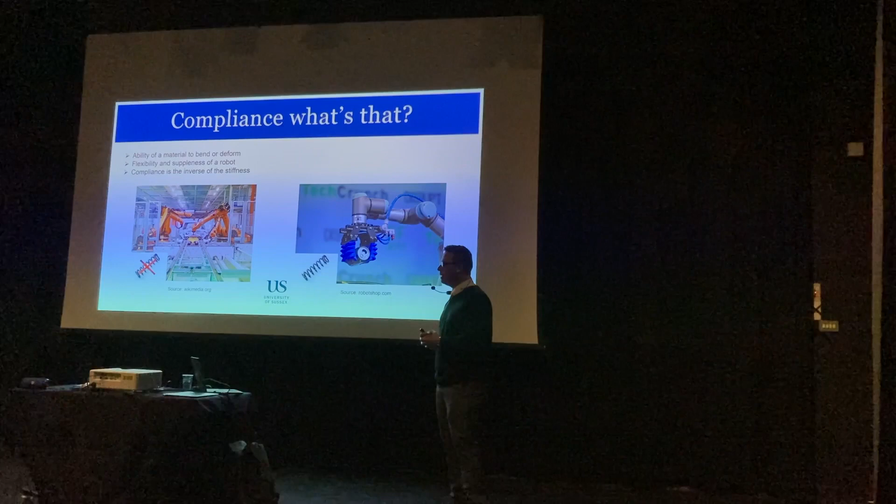So I will start with a quick definition of what is compliance. Compliance is the ability of an object to bend or deform. I often take as an analogy the simple spring - it's a mechanical element which, if I apply a force, will deform and displace. The compliance is actually the opposite of the stiffness, so it's the ratio between the displacement over the force. It's used to describe the flexibility or the suppleness of a robot.

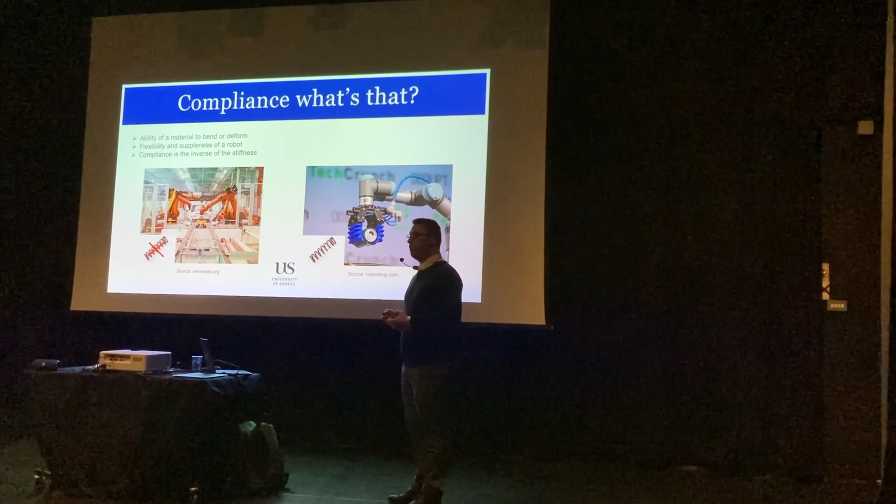I take as an example those type of robots which I consider as stiff, so not compliant robots, which are classic industrial robots. You can see here probably in a production line for cars. Those robots need to be protected with those fences where no human is allowed to cross, except in a specific condition when the robots are stopped - because since those robots are very stiff, they may be dangerous and could harm anyone entering their workspace while they are moving.

So I oppose those type of robots to this type of robot. Here we have a UR5, which is a universal robot, called also a cobot for collaborative robot. In its controller and design, it's meant to be collaborative with humans. For this type of robot we find some control strategies that will allow users to apply a force while it's moving, and the robot will interact safely with the user.

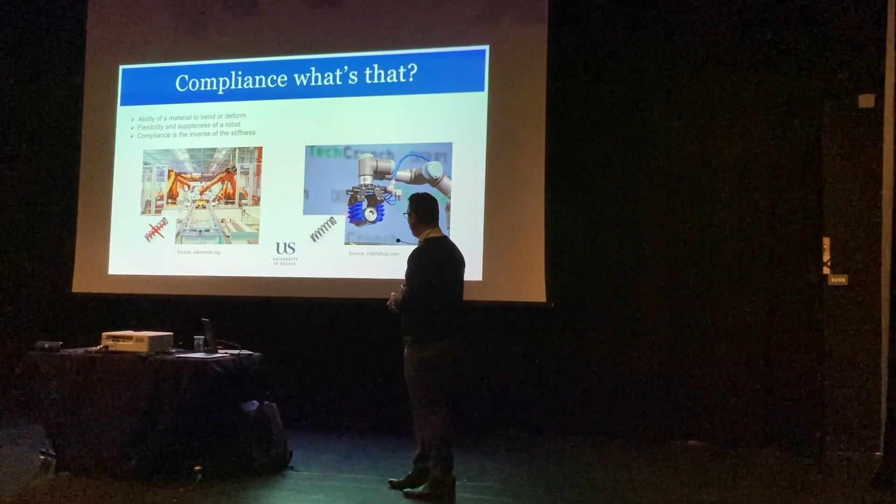Additionally, we can see that here in the gripper we have what we call a soft gripper. This gripper is made with elastic material, which will also bring some compliance to the robot, so you can see here it can grab an empty can without crushing it. So basically, I'm working on compliant robotics, so I'm more on that side of the robotics.

Now, to explain a bit how we can make a robot compliant, there are, I would say, two main approaches. The first one is basically using a mechanical approach. So in the design of the robot, we will either use some soft materials - soft robots, soft materials are robots that are made from elastic materials, elastomers, rubber silicone, those type of elements. This will bring an elastic body to the robot.

We have another approach using passive elements. So I gave the analogy to a spring earlier - we can introduce some passive element. Here you can see some springs; the name of that device is called the remote center of compliance. By putting those springs in parallel, if we try to guide the robot to assemble two parts, and those parts are not perfectly aligned, this compliance will take over and allow the alignment of the parts.

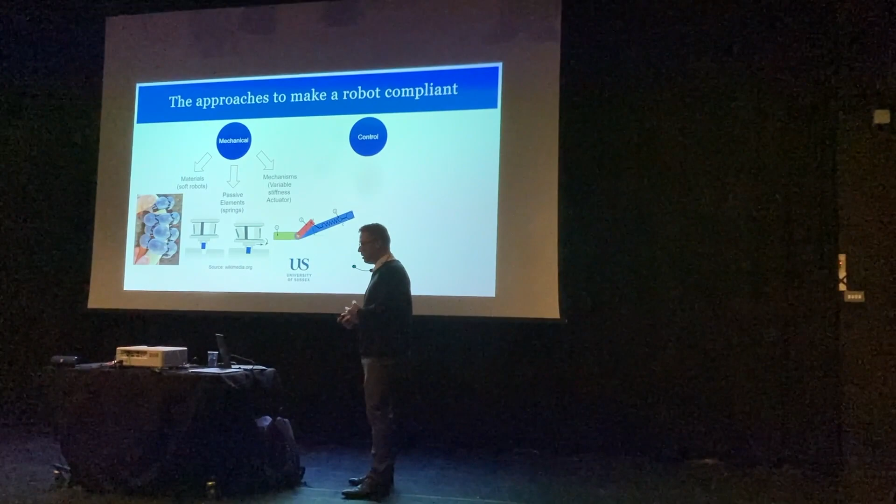Then another mechanical approach is designing what I call compliant mechanisms. Those mechanisms are generally composed of different elements. Here we have an example called the MACEPA, which stands for Mechanically Adjustable Compliance and Controllable Equilibrium Position Actuator - it's really long, so MACEPA is fine.

So we have three parts basically: the green one, which is attached to the base of the robot, and then here we have the robotic joint itself, and we will have two motors - one that will basically position the red link here to a direction, and the second one that will basically tension a spring.

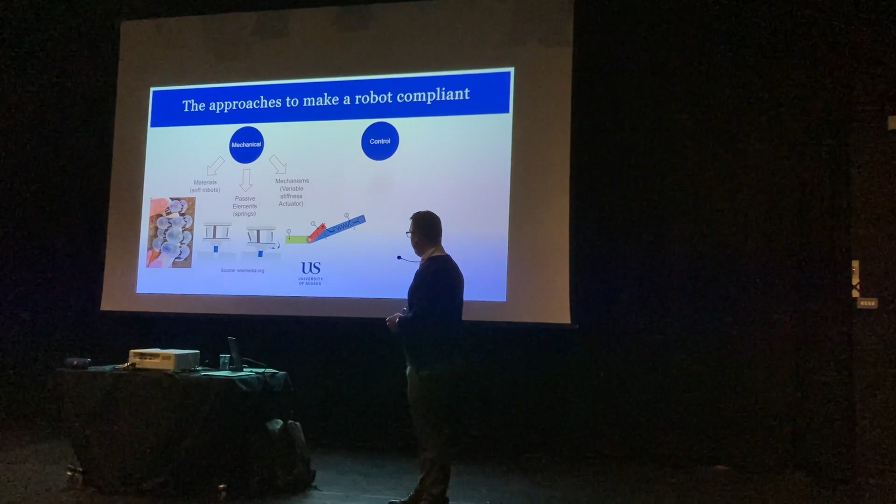The first one can give a general direction, where the second one, attached by the spring element, if I apply an external disturbance to the robot, will basically comply around the expected position given by the red part. So with the second motor, I can adapt the stiffness and compliance in real time according to the condition—do I want a very stiff joint or a compliant joint according to the scenario? We can tune that with that second motor.

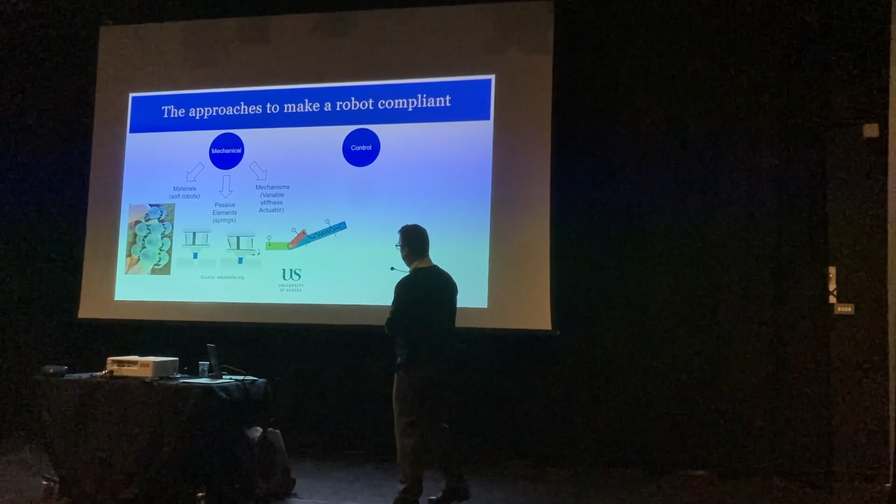So that's the mechanical approach. Of course, there are also possibilities to work on the control strategy—how do I control my robot to make it compliant? Here are some examples of control strategies for robots that bring compliant behavior to the robot.

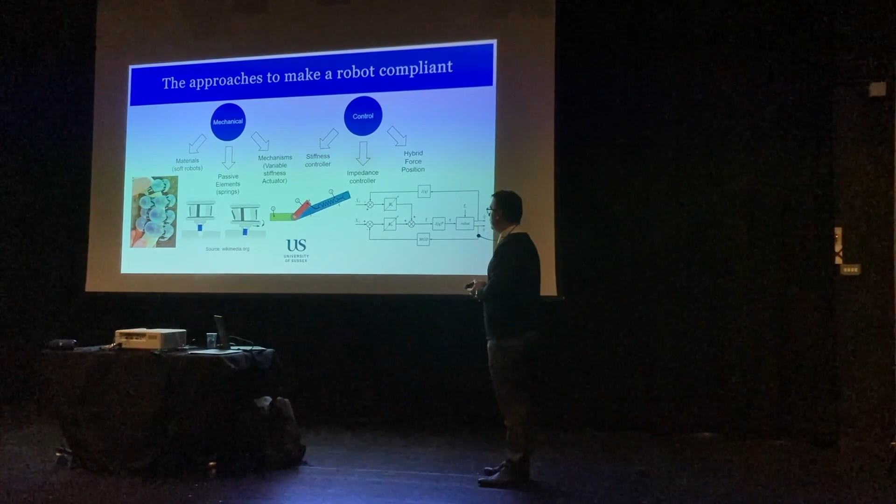The main ones are stiffness controller, impedance controller, or hybrid force position. These generally rely on measurement of the disturbance, the external force applied by the environment or the user, which is then implemented in a control strategy. Instead of being very accurate on the reference position we aim to have, we take into account that interaction to move the robot and comply.

So if I have to compare all these methods quickly—of course it's a bit more complicated than that, but I'll try to simplify the context—the control strategy approach needs minimal hardware modification, meaning that except for possibly adding a few sensors, we don't necessarily need to redesign the whole robot. So it's quite interesting in that sense.

One of the limits is the bandwidth, since most of those strategies rely on the fact that we need to sense the disturbance and let the controller react. They don't necessarily behave super well when the interaction is at a really high frequency, or with any shock, for example. Sometimes the impact with the robot is already done, and then the controller starts trying to add the compliance, but it's not necessarily instant.

The other approach, based on mechanisms or variable stiffness actuators, is generally quite simple to control because they're built so that one element deals with the position we try to reach, and another element controls directly the stiffness. So it's quite simple to implement. However, they generally get a very limited range of stiffness variation—the compliance we can reach is generally always in the same range, due to the fact that they rely on passive elements.

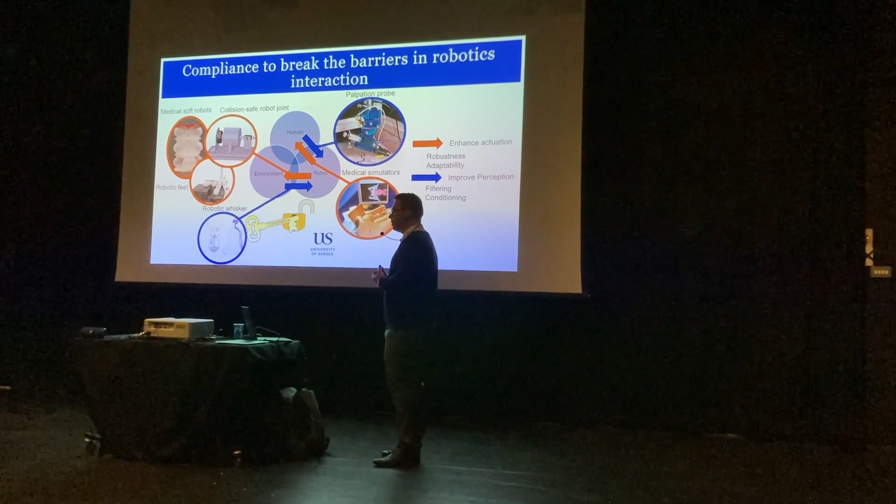So I believe that compliance is really the key to breaking the barriers between the robot and the humans, or the robot and the environment. I will try to illustrate that through different examples taken from my research. In particular, I would like you to appreciate how compliance can enhance actuation, making things more robust—robust to disturbance, to unpredicted conditions—or adaptable, meaning it helps robots adapt to uncertain environments.

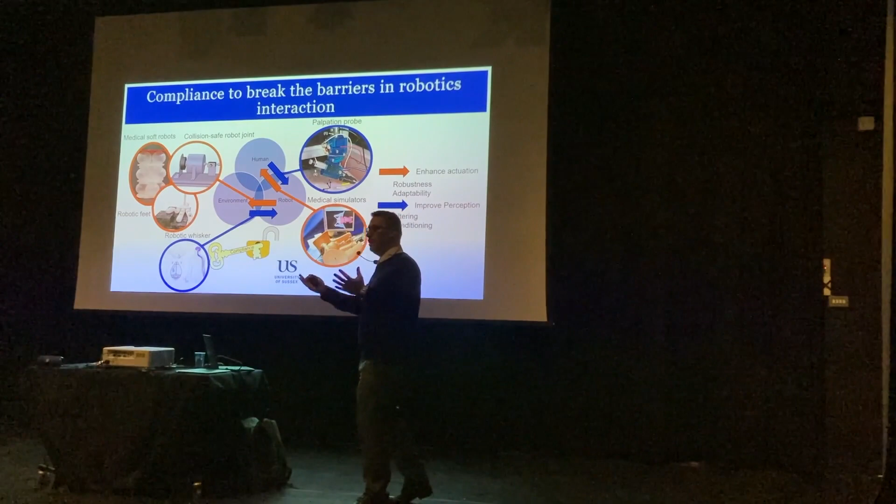The second thing is that it can also improve the perception—by perception I mean the sensing of the robot. Since compliance is actually a kind of element that can filter the mechanical signal, it can play a role where, using compliance, we can basically filter out the unnecessary mechanical signal that we don't need, and condition the perception of the robot to extract really the information that matters. Unfortunately I won't have time to cover all these examples, so today I'll focus on the perception with the palpation probe, and for the actuation part I'll talk about three examples in more detail.

So I propose to first start with the palpation probe, and to give a bit of context about this probe.

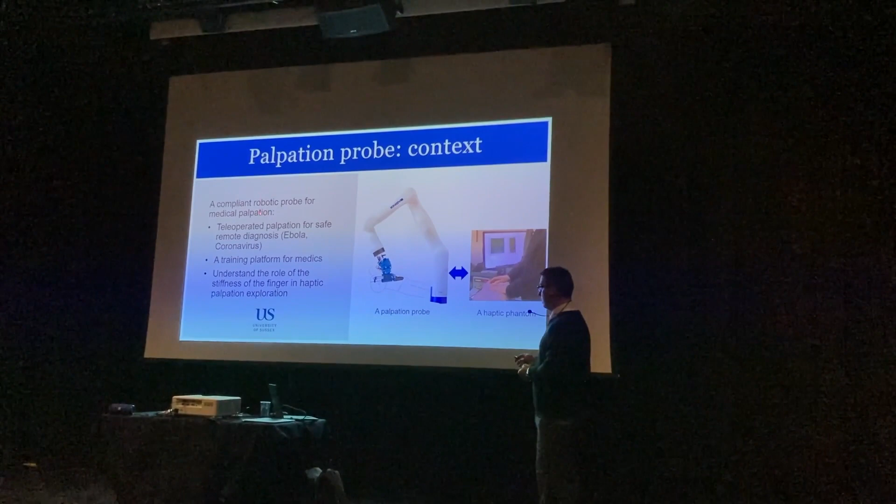It's basically work that I've been doing while I was at Imperial College, before the big coronavirus pandemic. At that time we had Ebola in mind, which is a really contagious disease, and we were thinking that maybe having a robot that could perform palpation on the patient would be interesting, because a GP practitioner could be in a safe place sending a robot to perform the palpation. The robot would send back the data to the GP, who could evaluate the state of the patient remotely.

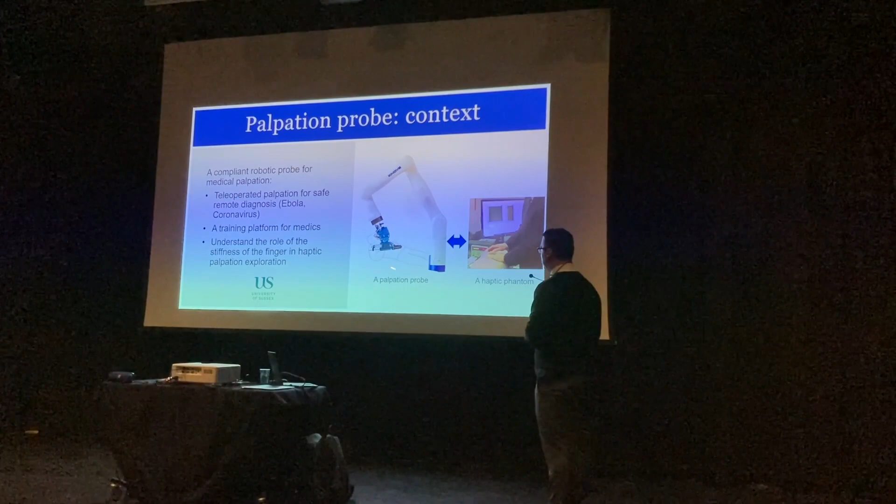So to do this, we worked on the palpation probe to analyze the condition of the patient, and a haptic phantom. A phantom refers to an advanced mannequin that reproduces a patient's condition. The idea was to develop those two things so we can perform remote palpation. I personally mainly focus on that part, but I will talk a little bit about both.

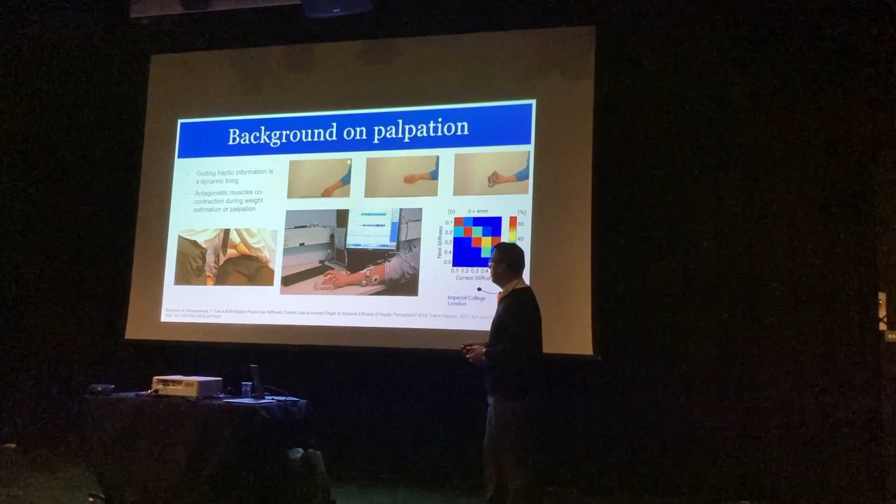There was some context already when I started working on this project, from work done by a student at King's College. What he studied is that when we try to assess a property, such as evaluating the weight of an object, or when a practitioner is performing abdominal palpation, we rarely do those types of tasks statically. If you ask someone to evaluate the weight of an object, they won't just grab it and say 'I think it's 20-30 grams.' Generally, people shake the object, and we were trying to figure out why we need that motion.

One hypothesis we developed is by measuring the muscle activity of antagonistic muscles in the arm. We noticed that at some point during those motions, we contract both muscles. Those forearm muscles control the motion of the fingers and wrist, but also their compliance. So if I contract both antagonistic muscles at the same time, my fingers become very stiff, but if I relax, they are compliant.

So we looked at how that compliance evolves during a task of palpation or evaluating the weight of an object, and we noticed that compliance is changing with time. The hypothesis we formulated is that compliance probably helps in getting more information during those operations.

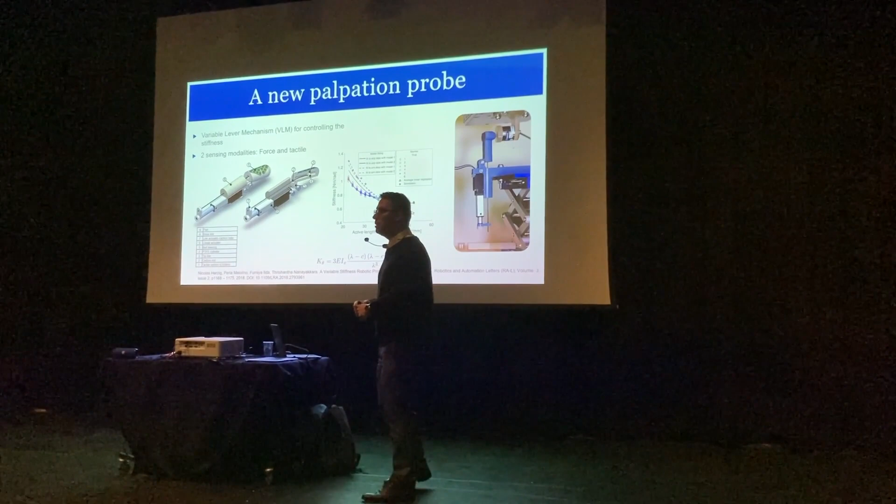To test that further, I decided to design a new palpation probe that could change stiffness in real time to perform palpation. Here is the model of the probe. You can see there are some rigid, 3D printed parts, and in the middle a carbon fiber rod that can bend — the same kind used in tents and similar products.

The way it works is simply the principle of a cantilever. If the cantilever is very long, it's easy to bend at the end; if I shorten the length of the beam, it becomes very stiff. So by changing what I call the active length of the cantilever beam, we can change the stiffness at the joint level of the finger.

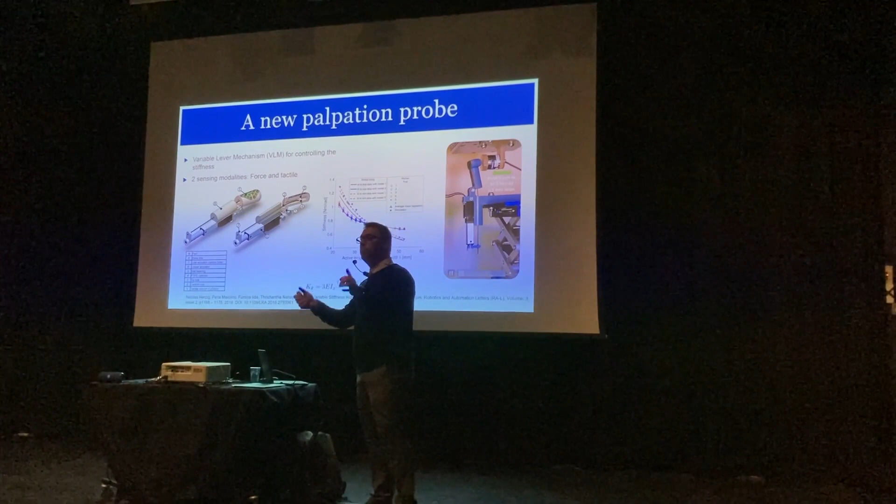So we studied how that stiffness and compliance change according to the length, and then I started to investigate the palpation aspect.

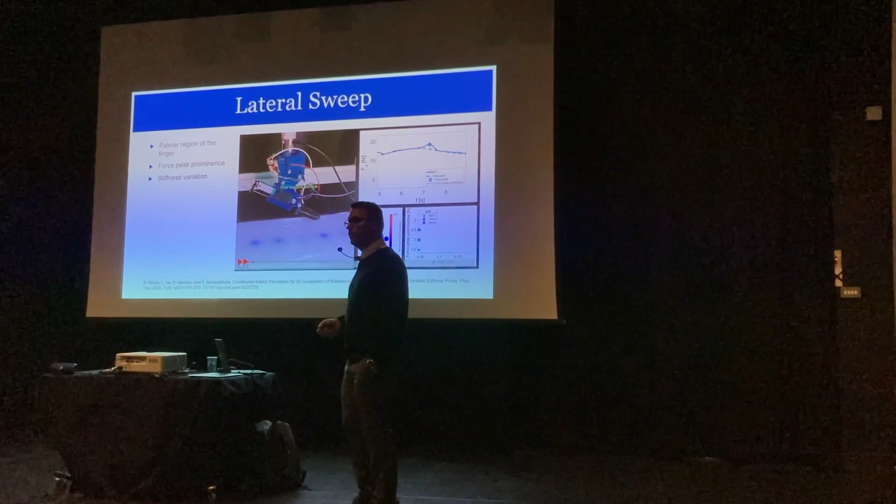Here we have a rubber silicone material, which is quite soft — we tried to match the stiffness of soft tissues during palpation. Inside that silicone I placed some plastic beads which represent cancer tissues that would be stiffer than the rest. The idea is, can we first detect this type of stiff inclusion, and can we even predict the depth — how deep are those nodules.

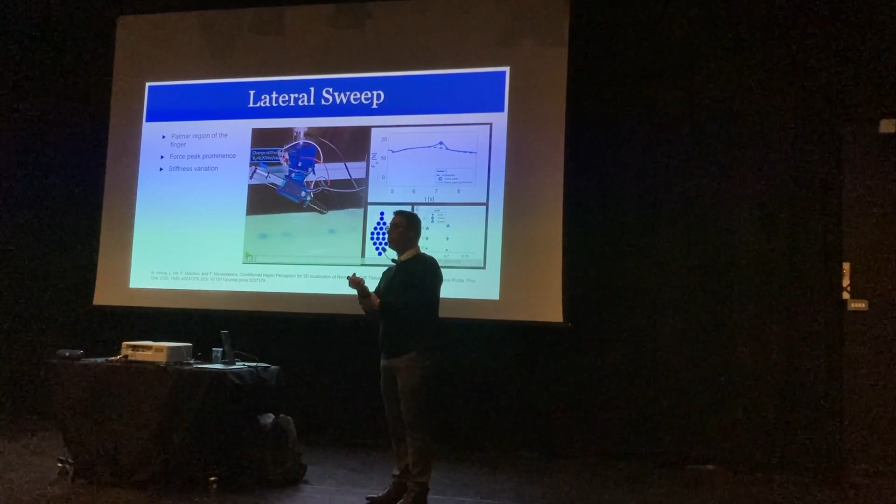I studied two types of sweep for the finger. The probe is equipped with two sensors: one is a tactile sensor, which measures what happens at the skin level when we palpate, using capacitive sensors to measure the pressure contact at the skin level. The other is a force sensor, a load cell, that measures the normal force, representing the information we get from our tendons when we palpate — what we call the kinesthetic sensing of the body.

Using those two sensors, I studied what we could get from this sensing for different stiffness levels. We swept laterally with the finger fully in contact with the tissue, sliding across it, and we noticed a peak of force when the probe reached over the nodule. Using that peak information, I can estimate when during the sweep the nodule was detected.

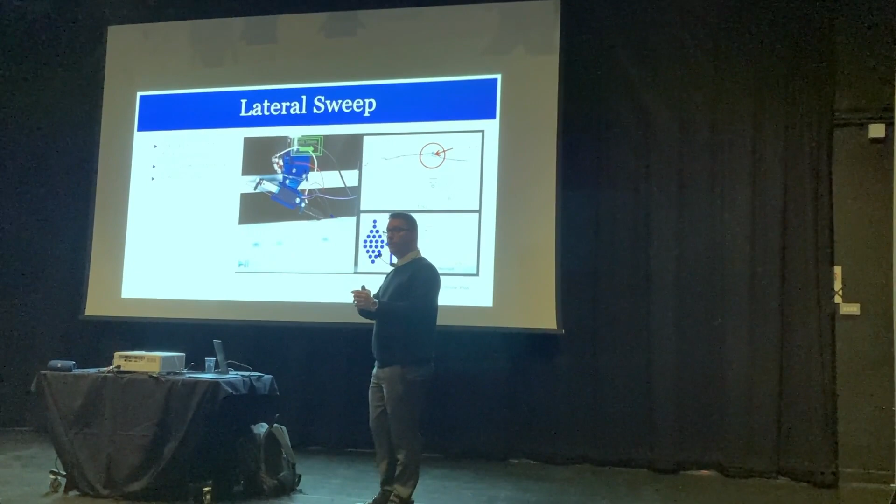And with the tactile information, maybe I can locate where in the finger was that nodule. By correlating the two pieces of information, I can localize where the nodule was.

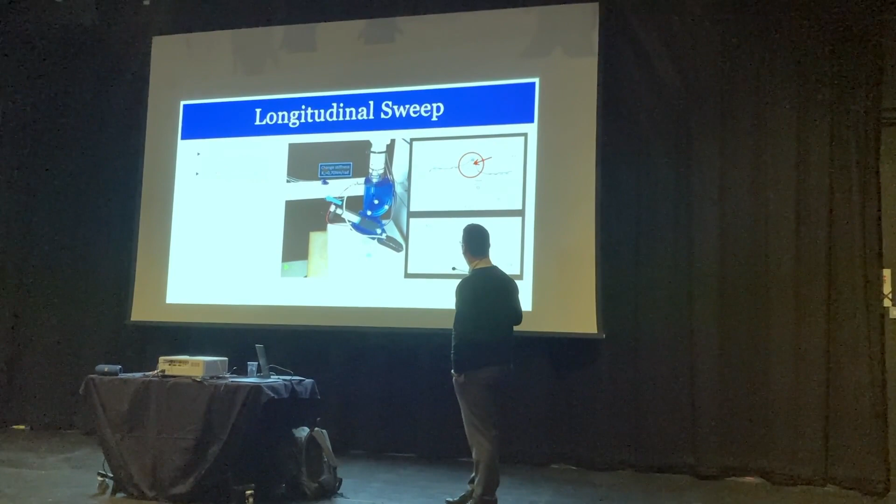The second type of sweep I've been investigating is what I call the longitudinal sweep. This time we sweep the finger in this direction. Similarly, I tested with different depths of nodule, and different stiffness every time. We can see here that the range of values is the same, but the peak is slightly easier to detect.

After combining all the results, this is what we obtained. I know those figures might be a bit scary at first, but basically what it shows in summary is that for the lateral sweep, we have a gap. Those are probability distributions, and we can see that they are separated.

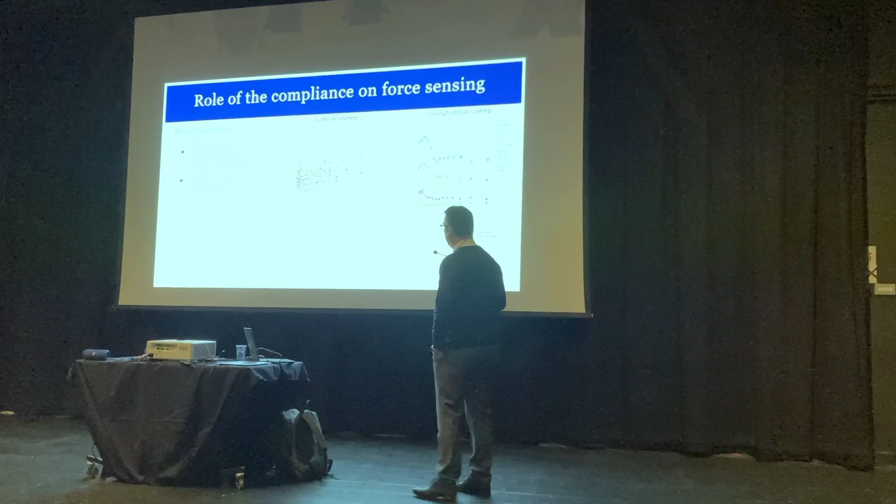So for the force peak, when there is no nodule and when there are nodules, what it means is that for the lateral sweep, we can detect when there is a nodule versus no nodule, but it's extremely difficult to estimate the depth. You can see that for different depths, the distributions all kind of merge, and it's not really possible to detect the depth of the nodule.

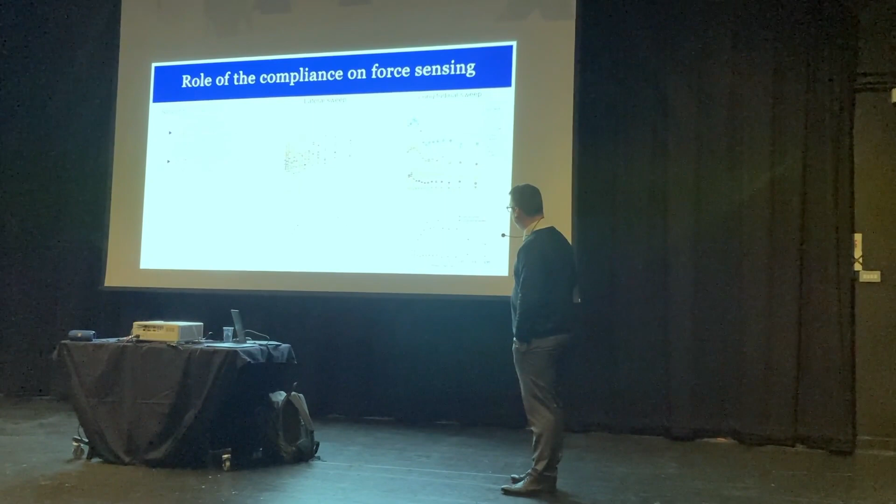However, if I look at the longitudinal sweep, we can see that this time the case where there is no nodule is quite close to the case where the nodule depth is around 8 millimeters, but we can distinguish each depth independently. Moreover, the role of the stiffness, the compliance of the finger, plays a role. You can see that the distance between two distributions for some depths changes with the stiffness.

It means that if I look, for example, at this stiffness, the force peak measured when the nodule is at 8 or at 6 millimeters are kind of overlapping. So that's probably not the best stiffness to distinguish between those two depths. But on the contrary, the distance between 4 millimeters and 2 millimeters is quite large, so depending on the force I measure, I'm more likely to decide if it is 2 millimeters or 4 millimeters.

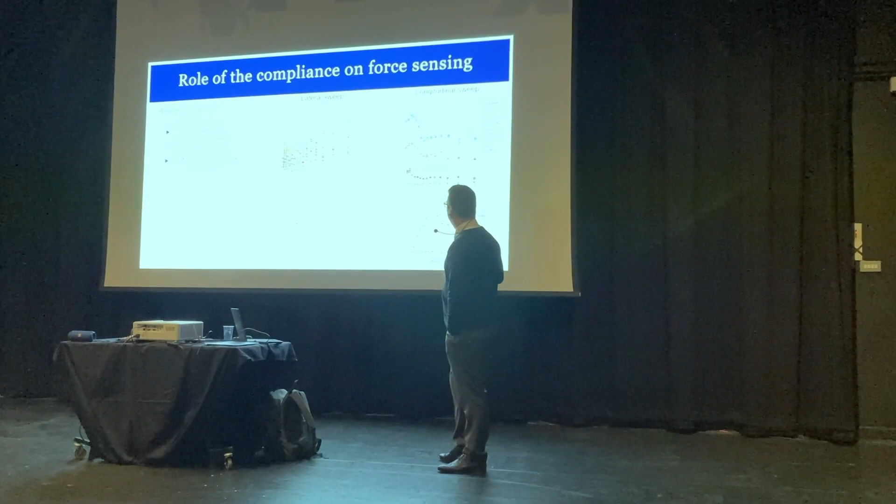So we built a tool called the information gain, which measures for each stiffness what is the amount of information I will gain if I need to detect this specific depth of a nodule.

And I basically implemented that in a control strategy. The way it works is the control strategy will start with a lateral sweep. I position the probe randomly over a region I want to examine, and the robot will first detect where the tissue is, then proceed with a first lateral sweep.

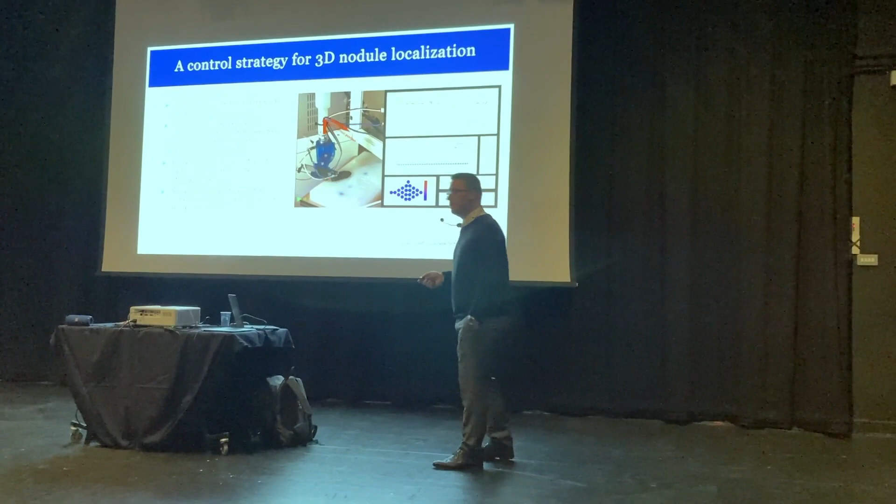That allows me to localize, in two directions X and Y, the position of the nodule based on the peak force measurement and the tactile sensing. Then, in the second step, we try to estimate how deep that nodule is.

To do so, we use what we call a Bayesian inference. We repeat tests with different stiffness until we confidently estimate the depth.

So we have the first sweep with one stiffness. You can see that at the beginning, the probability of being a certain depth is constant, and after that first longitudinal sweep, the algorithm starts to determine that it's more likely to be around 4 millimeters.

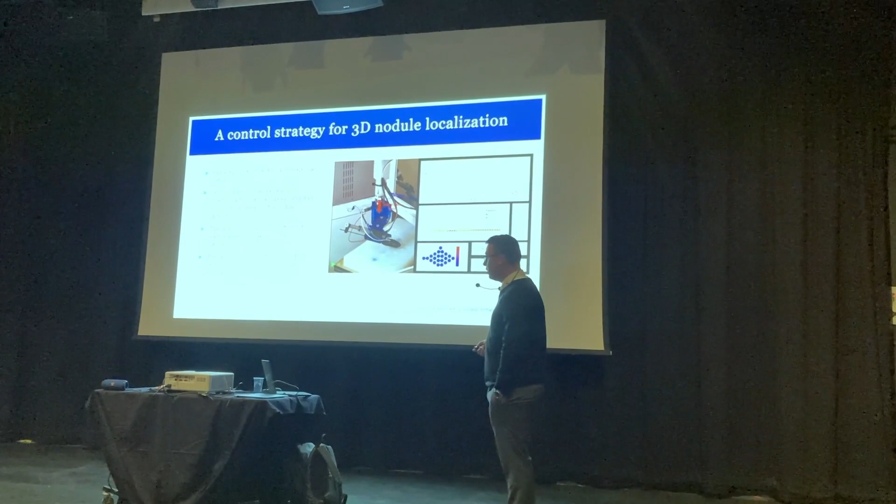Then we adjust the stiffness to try to maximize the information we will gain from the next sweep. After the second longitudinal sweep, we estimate with a bit more confidence that the nodule is at 4.5 millimeters. The actual value was 4 millimeters, so we are under 1 millimeter accuracy.

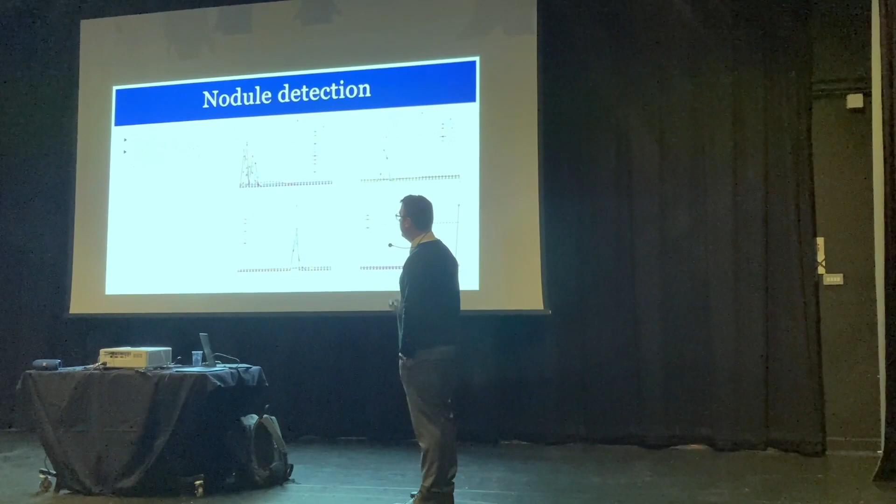So here are the results. We tested different depths to evaluate, and basically the algorithm was quite confident with 100% detection, meaning every time there was a nodule, we could say there was at least a nodule. The accuracy in depth estimation was under 1 millimeter, with 3 to 10 Bayesian iterations, meaning we had to repeat the sweep up to 10 times.

If we look at how the algorithm changed the stiffness, sometimes it ran 2 or 3 times in a row with the same stiffness, because the algorithm considered it was still gaining information by repeating with the same stiffness. But it was also adapting the stiffness from time to time to gain more information when another stiffness was more interesting to estimate.

So that's one of the limitations of that algorithm: it requires knowing in advance the value of the peak force. That means we probably already performed some palpation on this tissue, and that's a big limitation in the context of medical application, because we might not have access to a big database of patient palpation.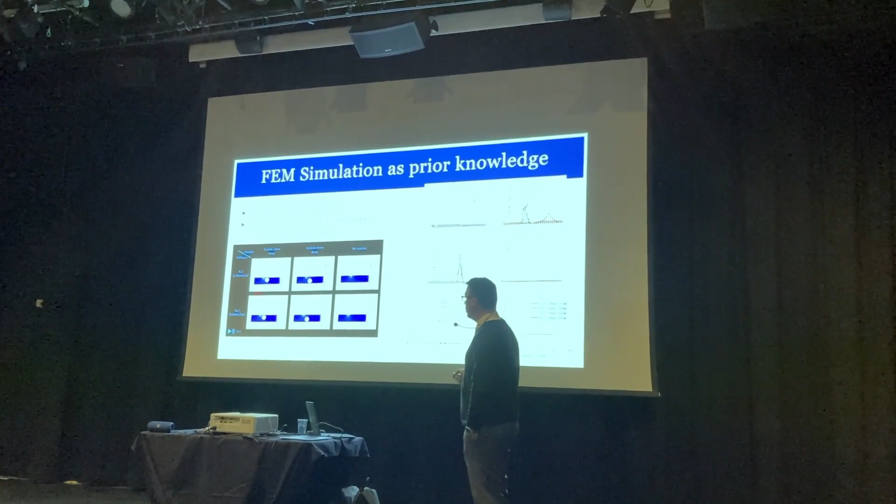So I also tested based on simulation. I ran some finite element simulations to simulate what's happening during the sweep, and based on the force peak estimation obtained with that data, I reran the test, not knowing the tissue I was palpating. The result was that it was as accurate but less confident, meaning the algorithm struggled more to converge to a confident value, and the probability distribution was slightly wider, so less confident on the estimation value, but it still worked.

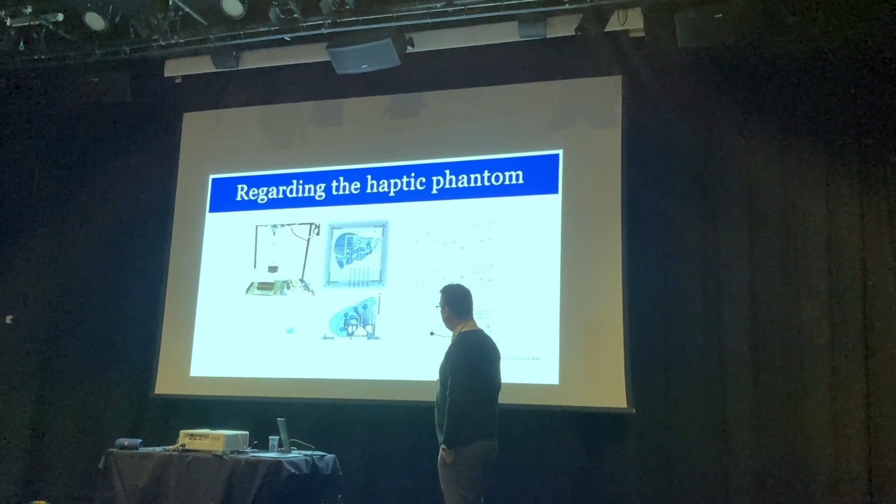I will just talk quickly about the haptic phantom part, the other part for the GP to run the palpation. Similarly, we use compliance there in the phantom. So we have basically some silicone rubber that mimics the stiffness of the liver, and we had also some silicone to mimic the amount of skin and fat on top.

And inside, we put some rubber balloons, basically, that we can inflate with different dimensions and different pressure. So we can mimic different patient conditions, some with, let's say, cancer tissues, or different liver conditions. And the interesting part is that when we want to describe another patient condition, we just change the pressure inside those nodules, and then we keep them constant so the GP can test.

So we can use that either to practice palpation or in teleoperation. And the interesting thing is that once the patient condition is set, generally we close the valves reaching those nodules, and we can use the pressure sensors to detect and estimate where the GP has palpated. That's quite interesting, because we use the same thing to mimic a condition and to measure at the same time, which avoids, for instance, adding sensors on the gloves, or other sensors that may affect the palpation of the GP.

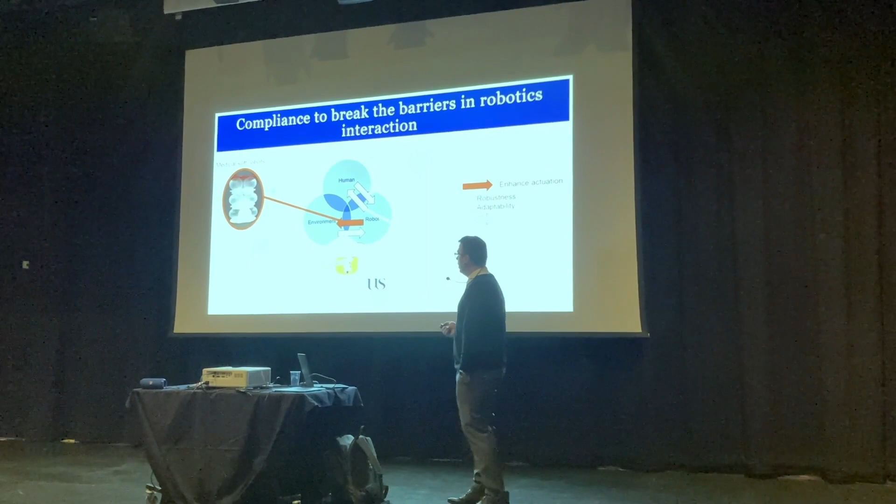So that's it for the part on the palpation probe. Now I will be switching to the part on the actuation, and I will present different examples where I think compliance is enhancing the actuation. I will start with this project, the medical soft robots.

So why do we need soft robots? It's because in the clinical context, the robots used for surgical environments are still rigid. Here we have an example of the Da Vinci robot, which is a really well-known robot for minimally invasive surgery.

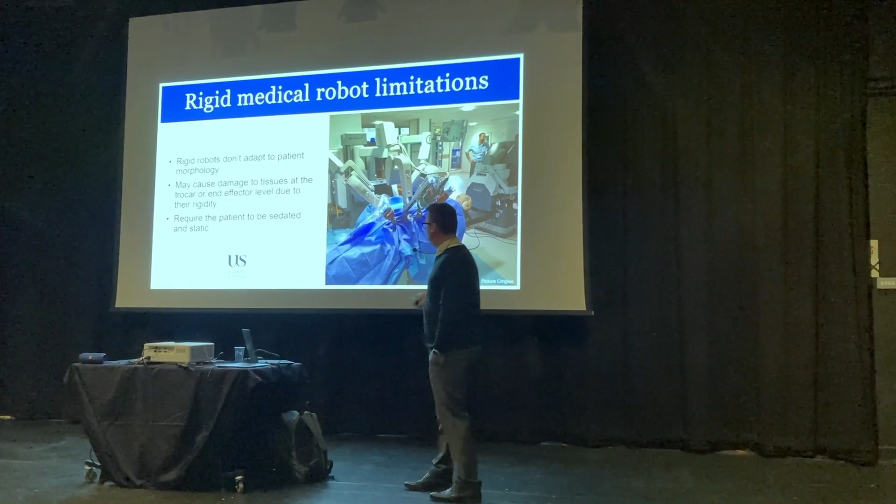So basically, here is a fake patient, a mannequin, but we have the 3 robotic arms. We have some trocars on the patient, small incisions. They inflate the tummy with some carbon dioxide, and they can perform minimally invasive surgery with the robot. So here we have the robot, and here we have the interface where the surgeon sits and sees, with an embedded camera, what's happening, and two joysticks to control the robotic arms.

So the problem with those types of robots, in my point of view, is they are great, they allow amazing things every day, of course, but one of the limitations is that due to their rigidity, they might create injuries at the trocar level or at the end effector where the tool is. So the surgeon needs to be consistently aware of exactly where the tool is, and what is happening at the trocar level, to prevent any injuries.

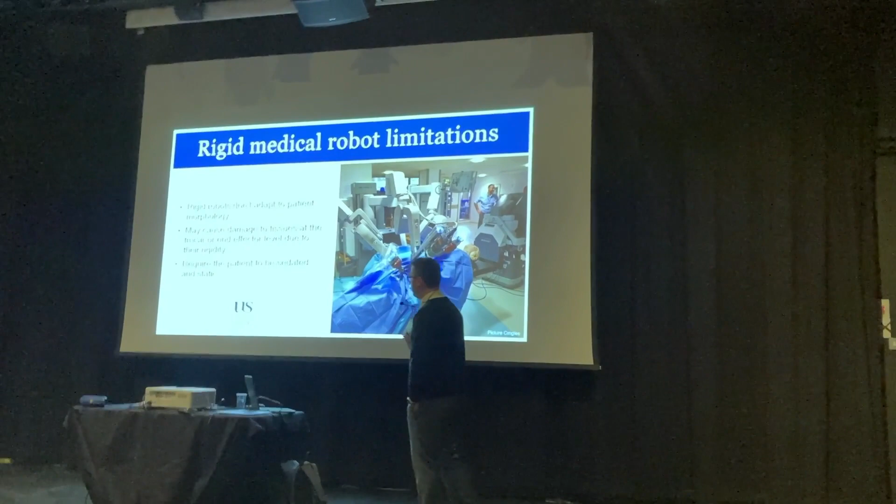So I believe that bringing soft robots into medical applications can be a solution to prevent that. Also, in those contexts, the patient generally needs to be sedated and completely static to prevent injuries, because those robots won't adapt to the patient. So, in this context...

At the University of Sheffield, we used to think that medical soft robots could be used for doing what we call mechanotherapy. So basically the idea would be to use mechanical stimulation to help some tissues regenerate or simply grow. And we have two pathologies in mind that we worked on.

The first one is long-gap esophageal atresia, a pathology where the patients, generally babies because they're born this way, are missing a piece of esophagus. One way to treat that, which is very invasive, is multiplying the surgeries to apply mechanical stimulation to the esophagus and try to actually extend it until the two pieces are long enough to be sutured together.

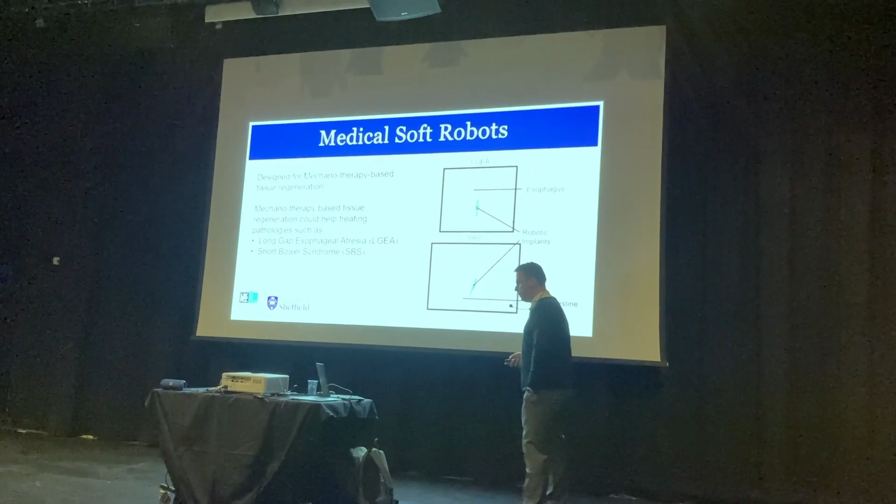Similarly, there are some patients that suffer from short bowel syndrome, meaning they have a smaller intestine than usual. A possible therapy would be to stimulate the intestine so it increases in length. In that context, I designed the following continuum soft robot.

It's composed of different layers that can be inflated, and when fully retracted it looks like that. If I pressurize each balloon, we can inflate the robot and reach up to 180% elongation, which is quite long for a robot.

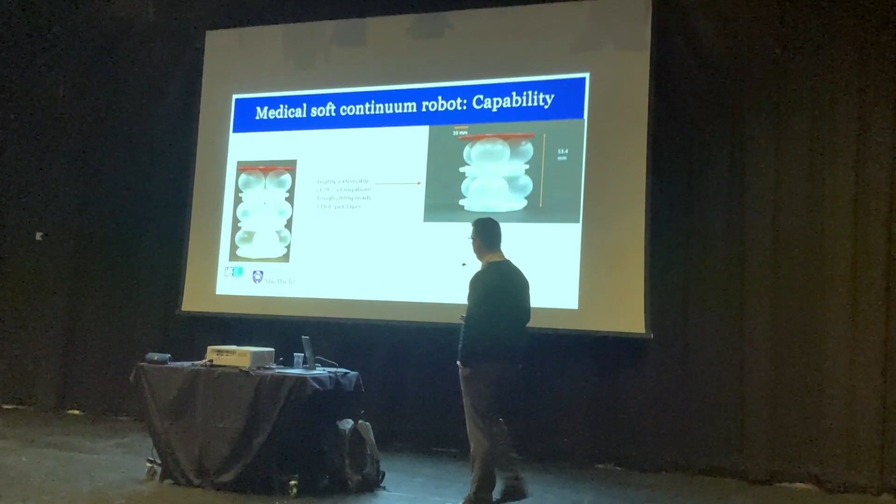It can withstand up to 800 grams, and you can see here, for example, the book that I put on top was not necessarily straight, and the robot will comply—that's one of the interests of this type of robot inside the body.

We could potentially implant that, and the patient will still be able to move, and the robot will comply to the morphology of the patient.

Finally, it's also possible to actuate it in different directions if we wish, by inflating the balloons independently. So how does it work?

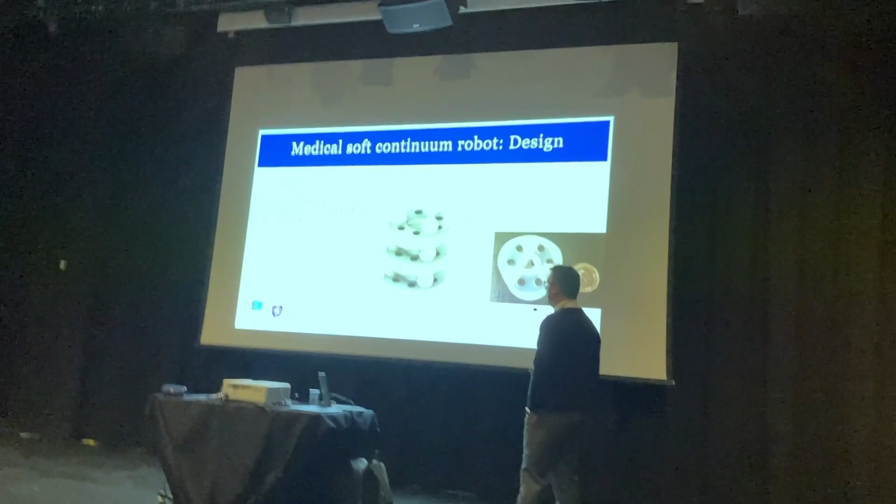How it is made is basically, as I was saying, several layers stacked on top of each other. If we look at one specific layer, we have some 3D printed rigid materials with a hole at the top and another at the bottom, and in the middle a rubber silicone membrane clamped in place, with some chambers.

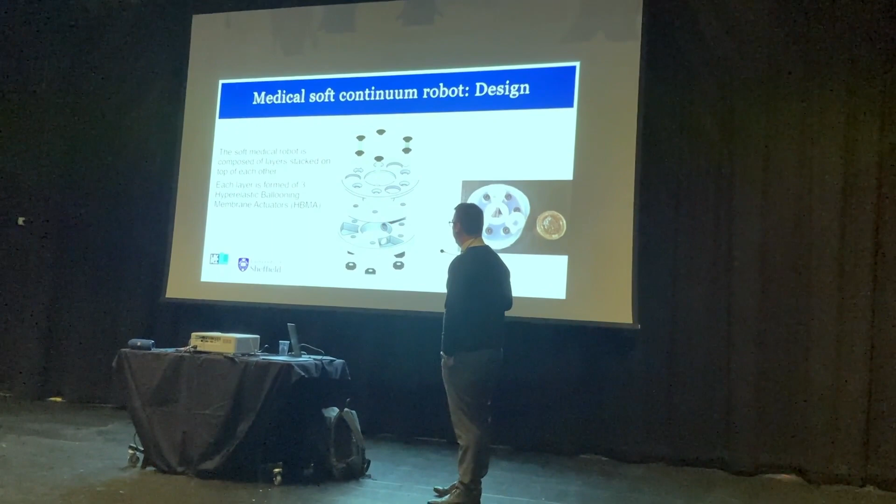So if I inject air into the chamber, it will push the membrane, and the membrane will naturally balloon outside. A single chamber with the hole in the membrane—I call that an HBMA, for hyperelastic ballooning membrane actuator.

Each HBMA can be inflated independently, so we can possibly control the orientation and position of the robot. During my study, I focused on the behavior of a single HBMA to try to understand how it works, proposing some models.

As I was saying, it's just a simple rigid element that clamps a membrane in between, and if I inject air, the balloon will inflate. Part of my research is basically proposing some models.

Of course, mechanical engineers know very well how to model this type of inflated membrane, and that has been done quite a while ago. The only issue is that those models are generally quite complex, and they are difficult to use in real time.

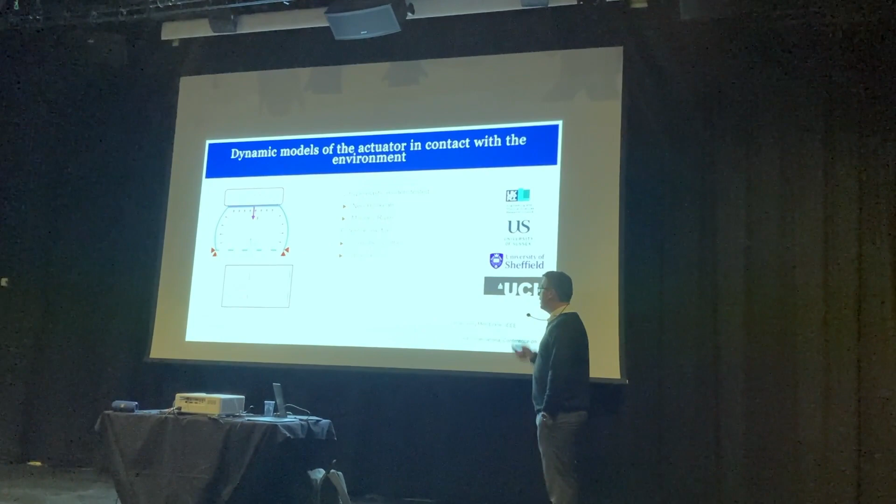So it means that if we want to solve these types of problems for a controller, it remains quite complicated. So my approach was trying to simplify.

What I did is simplify and constrain the geometry, and I proposed a very simple model that could be used for designing control strategy. I still retain some properties, like the hyperelastic property of the membrane here in blue, and the objective is to use that for controller synthesis or observers.

If I look at the result, as I was saying, here I'm simplifying the geometry. We have the experimental test here, and if I reproduce the simulated position, we can basically predict what's happening to that membrane that is compressed.

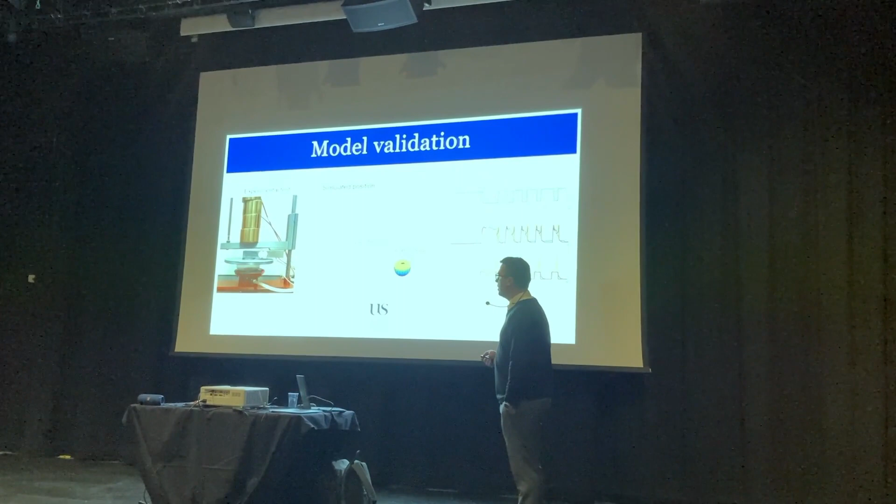The geometry, once again, is simplified. It doesn't necessarily match exactly what was happening, but the idea is: can I estimate the force and position of my actuator? We can see that if we compare the experimental result with the simulation, we have some match for the pressure and the force.

It's still ongoing research, in the sense that now I'm designing the controller for the robot. One of the issues for this type of robot in general is that, in terms of hardware, most of them are currently regulated in pressure.

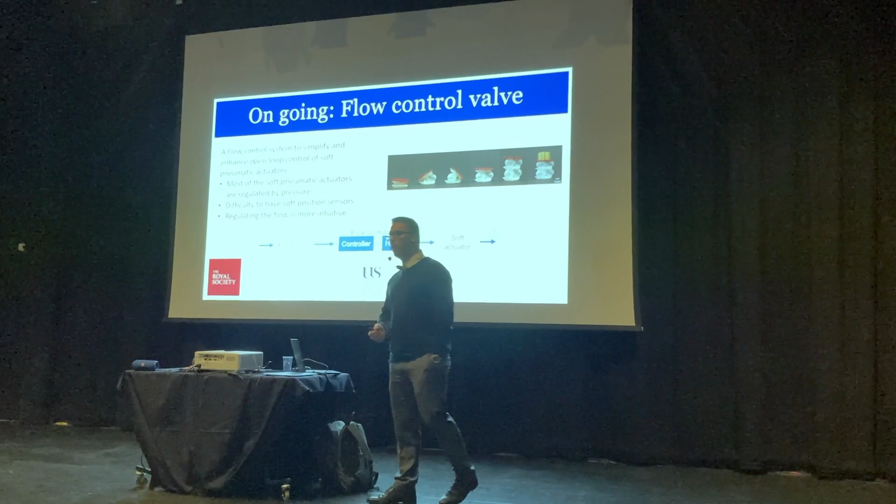But if you've ever inflated a rubber balloon, you may have experienced that at the beginning it's extremely hard to inflate—you have to apply very strong pressure—and then suddenly the pressure drops and it's really easy to inflate. So if you rely on pressure control, it's difficult to be accurate in controlling the volume of the balloon.

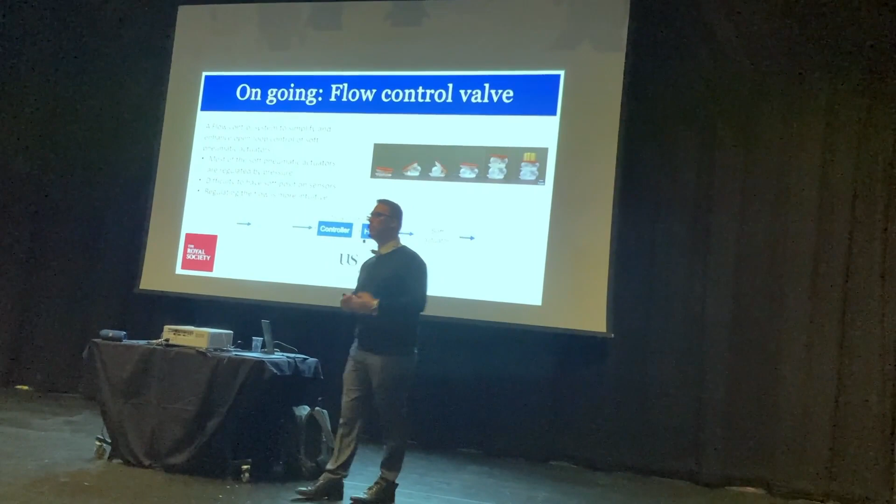So I would like to propose some strategies where we use flow regulation. If I know how much air I'm injecting into the balloon, I'm more likely to estimate its volume well. So that's what I'm doing.

The problem is, for this type of robot, we use quite low pressure and small flows, and the hardware available in the market, used industrially, is generally way over-dimensioned for what we need. So I'm working on proposing controllers and valves dedicated to such small flows.

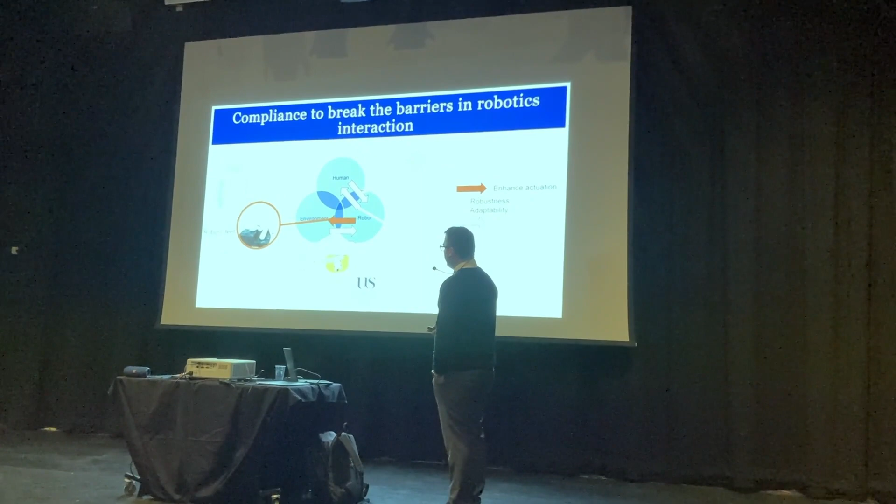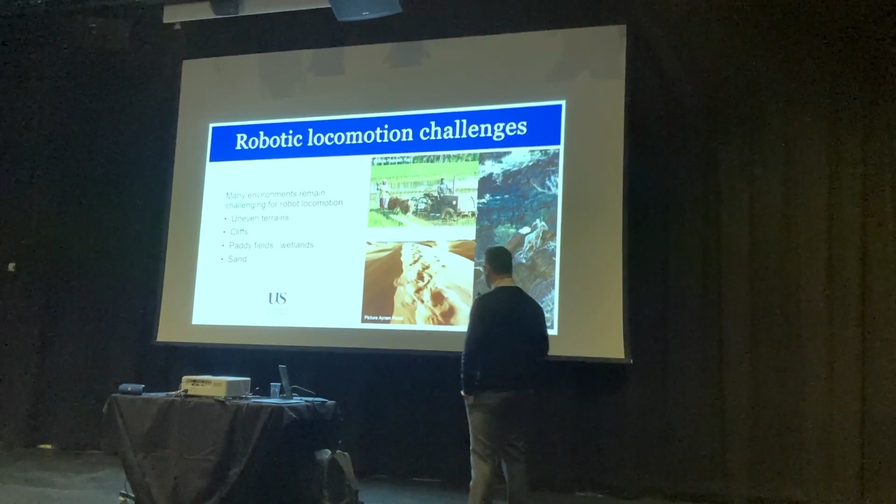Another aspect where I think compliance enhances actuation is in robotic feet. One of the challenges in robots, particularly walking robots, is that they're not really good in certain environments. When the terrain is uneven, very steep, sandy, or like paddy fields or wetlands where there's a mix of water and mud, it's difficult to bring a robot there. So we're basically trying to study what's happening in nature and what compliance can bring in those types of conditions.

So for the robotic hoof, the approach generally starts with studying the biological aspect. First we identify the links, to propose a robotic counterpart. Then we identify the different mobilities—generally we have to make assumptions because those joints move in several degrees of freedom, but for simplifying the problem we identify the main property of each joint and replicate that. Finally, we look at the tendons and ligaments, and model them with springs that bring compliance, trying to understand what compliance we should put for each element.

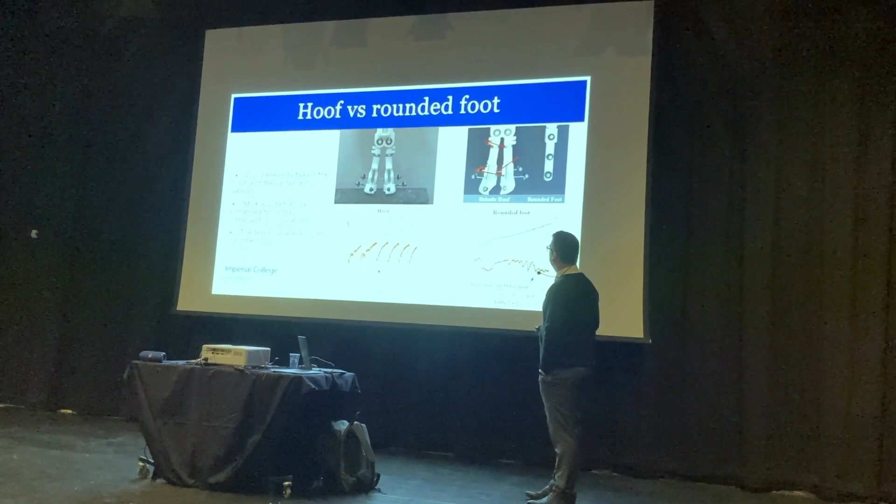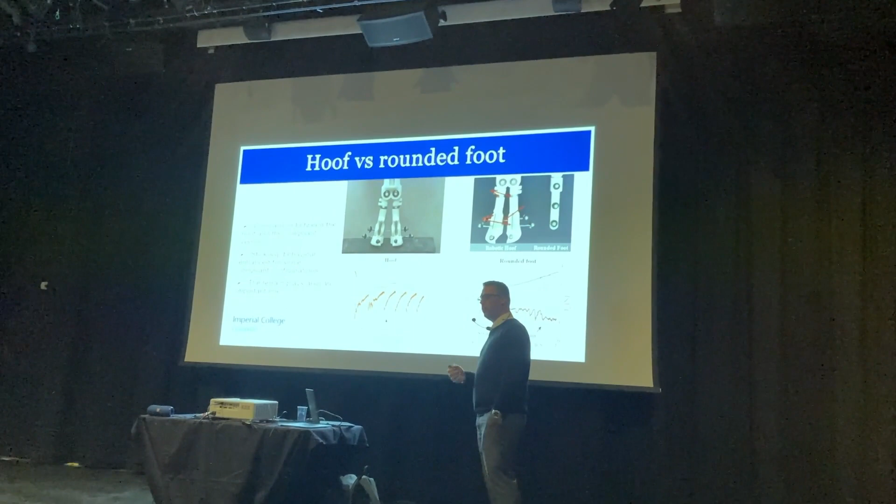So if we compare the hoof here and the rounded foot, which is currently mainly used in most quadruped robots like Spot or Anymal—they have round feet because it's easy to analyze and know exactly where it is for control. But we can see the robotic hoof presents this behavior: the force needed to slide it varies, with peaks quite high. You can see that for a bit the hoof doesn't move at all, then suddenly slips a little, whereas with the rounded foot the force needed to move it is lower, so it's more likely to slip, and nothing stops it from slipping.

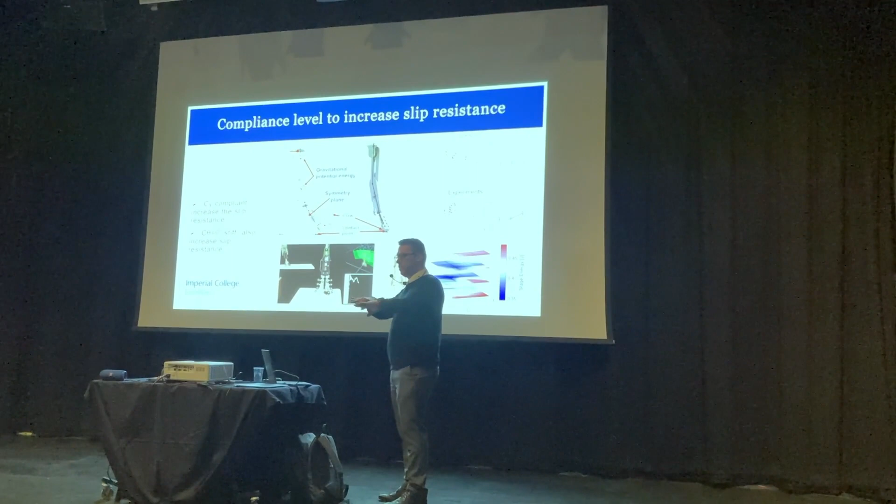So we studied the behavior of that hoof for different levels of compliance, and the findings showed that the yaw angle needs to be compliant—meaning the hoof needs to be able to open the toes—while the roll needs to be stiff, so the motion in that direction shouldn't be too high. If we analyze the type of motion, it's a bit like when someone is trying to brake while skiing: the yaw is flexible while the roll is a stiff angle.

Basically, this shows that choosing the compliance of the foot well can help reduce the slip of robots.

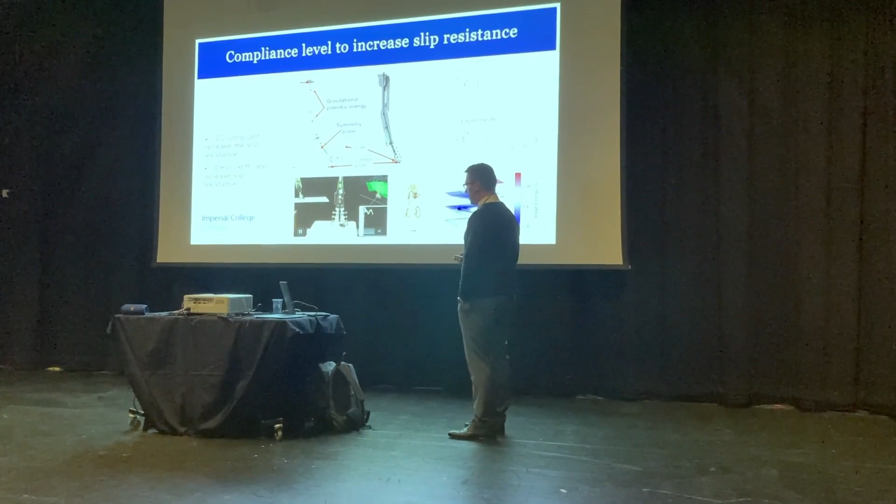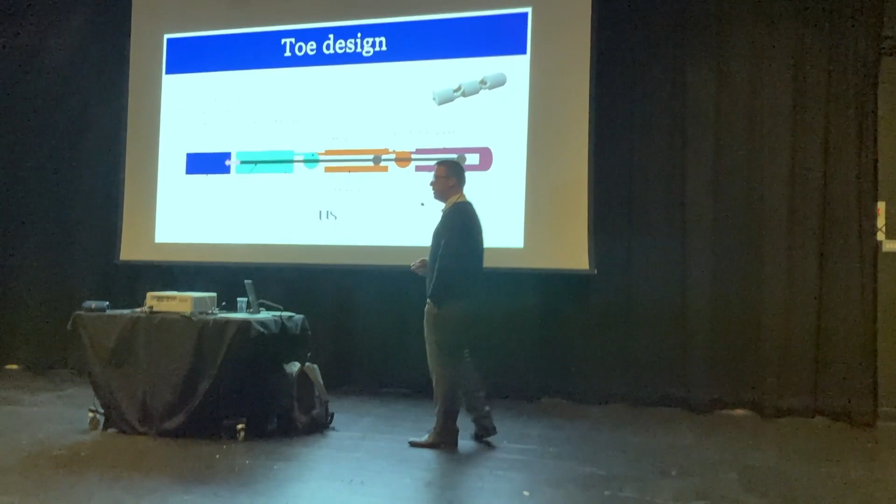Similarly, we are currently investigating with my PhD student the quadruped aspect, studying egret bird feet to understand how they adapt to mixed environments combining mud and water, and how those types of feet comply with this environment. The idea is to reuse a similar concept as for the palpation probe, but expand it to multi-phalange fingers and toes, and be able to change the compliance to see how it helps in those environments.

Finally, the last example for enhancing actuation is about a collision-safe robot joint. This project is running with colleagues at the University of Sussex, in the context of nuclear decommissioning. The issue with nuclear environments is the radiation, which damages sensors mostly—most components are sensitive to radiation, so we can't necessarily use standard sensors in the nuclear environment.

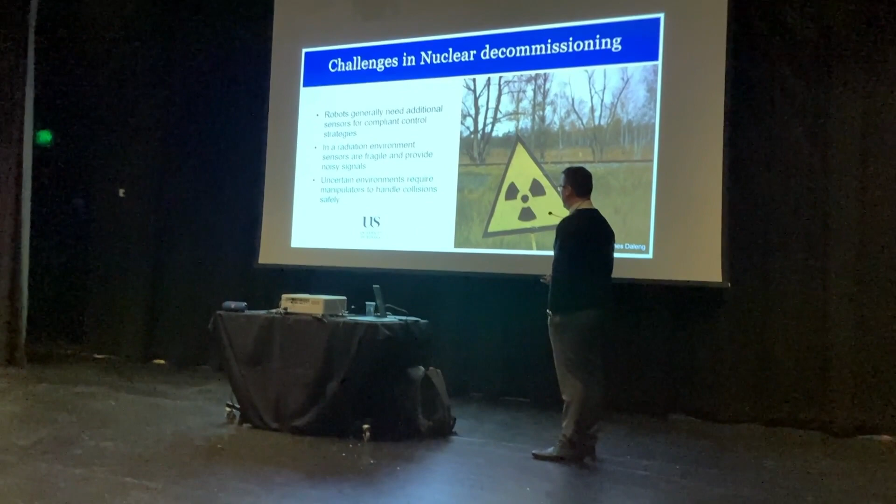It also brings noisy signals. But we still want robots to interact with the environment safely. So if we can't add more sensors to detect the environment, can we solve that problem using compliance and mechanical aspects? That's what we did—we propose a solution based on a CVT, continuous variable transmission. The idea, to keep it simple, is that we have the CVT as a transmission between the motor and the robotic joint. If the robot hits an obstacle, the transmission will vary—the motor can continue running, but the transmission will mechanically detect the collision and stop the joint from moving further.

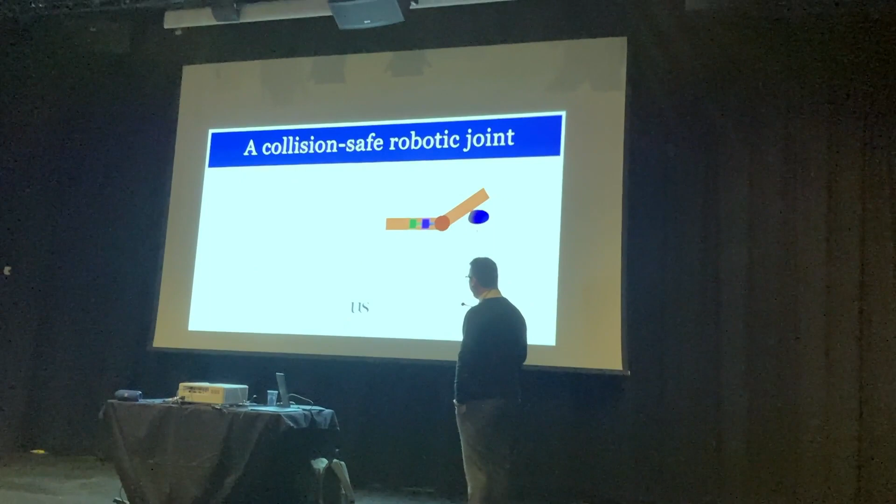So if I zoom in a bit and explain how it works: here we have what we call a toroidal CVT. We have some different discs connected with a ball, and basically if I spin this toroidal disc, it transmits the rotation out to this output disc by friction here.

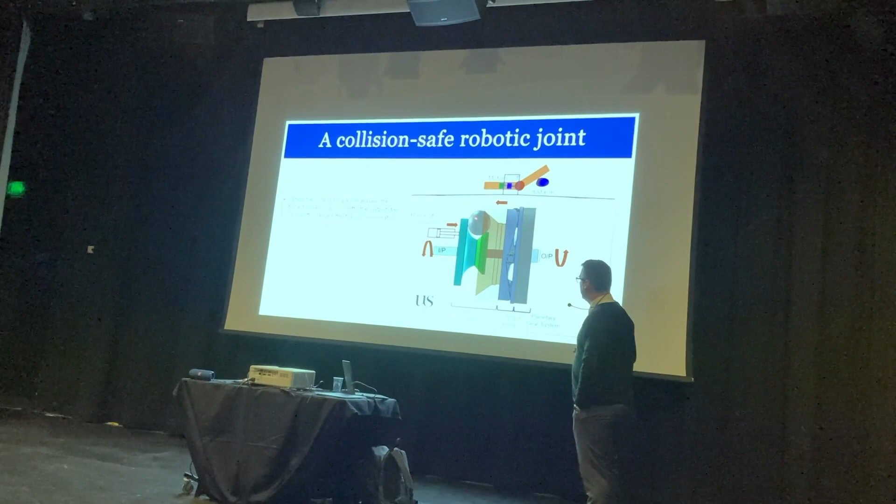So if I apply an external torque from that side, what will happen is we have a force torque coupling. It will push mechanically the disc on the left and push this disc a bit more on the left, and it will change the ratio of transmission of the CVT. And if at some point the output torque exceeds a certain value...

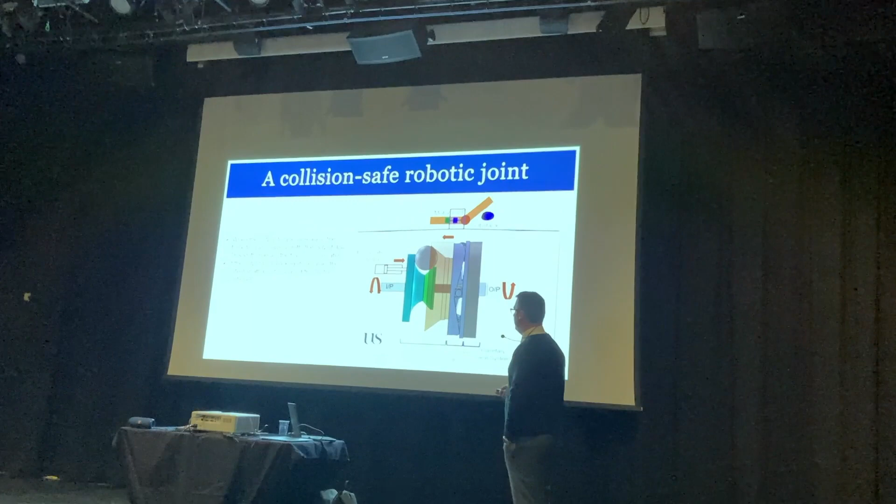the transmission ratio will even fall to zero, which means that the motor can still continue spinning while the output is actually stopped. We have a pneumatic cylinder here to apply a constant pressure at the toroidal disc level, and by changing the value of force that this cylinder applies, we can change at which torque the output will stop. So basically we have an element that makes a collision-safe robotic joint.

So by adding the CVT transmission at the joint, we could operate in that environment without damaging too much whatever is inside the room. The second scenario we're investigating is a project in partnership with the University of Tokyo, who are interested in using the technology for a robotic manipulator to clean the damaged units in Fukushima Daiichi nuclear power plant.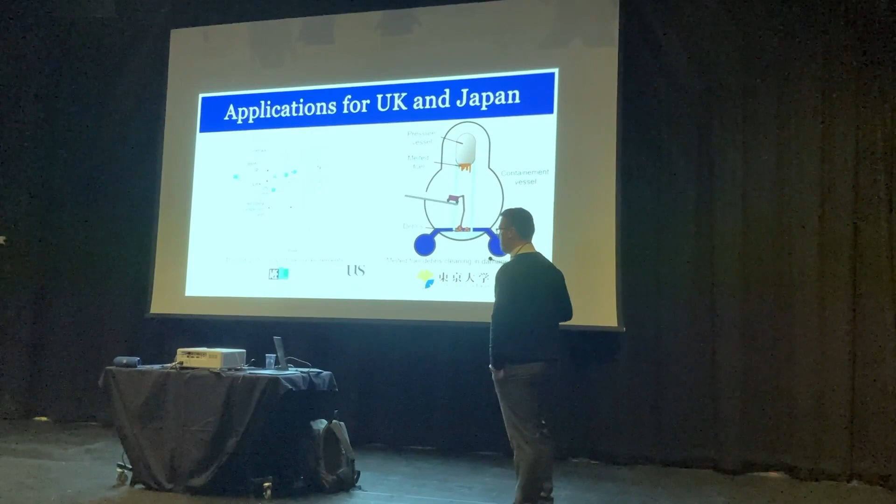So the pressure vessel is damaged, and some fuel is melting, and there is some kind of pebble-like, really high radiation material that needs to be picked up and stored safely to be brought out of the vessel.

So my contribution to that project is mainly studying the behavior of the compliance of the CVT in those collisions, but I also use my expertise in impedance control and variable impedance control to simulate the environment conditions.

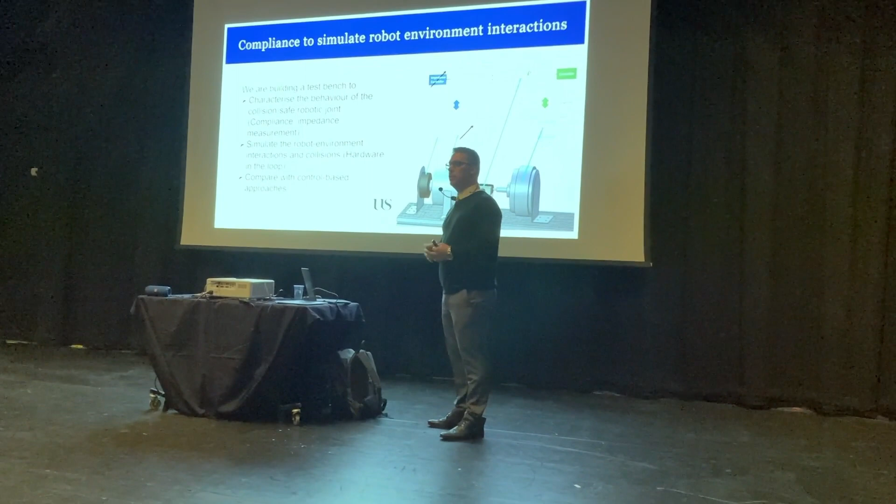So we test just the motor and the transmission, and we use a second motor that would simulate any collision, any interaction between the robot and the environment, to perform a kind of hardware-in-the-loop system.

That brings my talk to a conclusion. As I already mentioned several times, what I would like you to take away is that compliance is a very interesting element to study for robotics, and in particular it can affect the way they interact with humans or with the environment, and it has a role not only in actuation, which is quite obvious at the beginning, but it can also help to...

filter or change the perception of the robot, and sometimes simplify or filter unnecessary information for the robot. And it needs to be taken into account when we design systems - in particular, the position of the sensor or the interactive part of the robot, or the expected reaction to disturbance, needs to be considered when we want to study the compliance of the robot.

In future investigations, I'm really interested to develop some more soft robots for medical applications, and in particular I have in mind some rehabilitation or prosthetic devices.

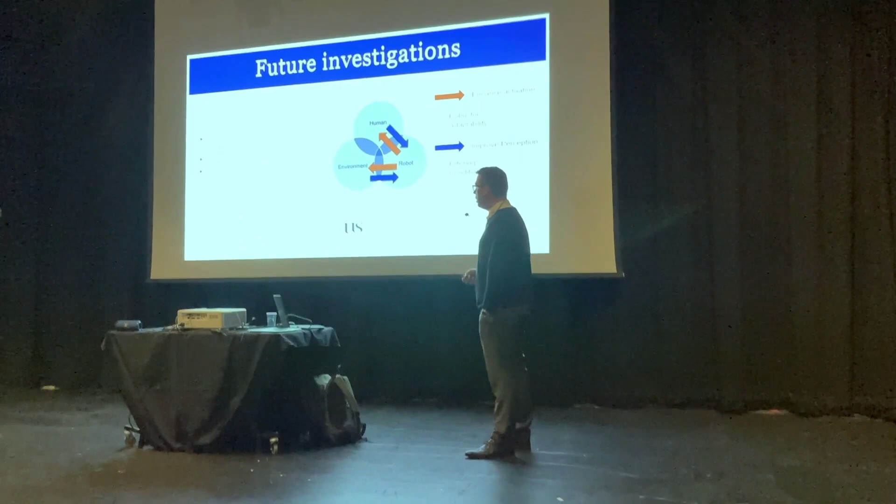And finally, I would like to study the impact of compliance on observability, following on from the fact that it can filter some information. Can I develop observers with the control approach? I mean observers like virtual sensors based on control theory, using the compliance aspect.

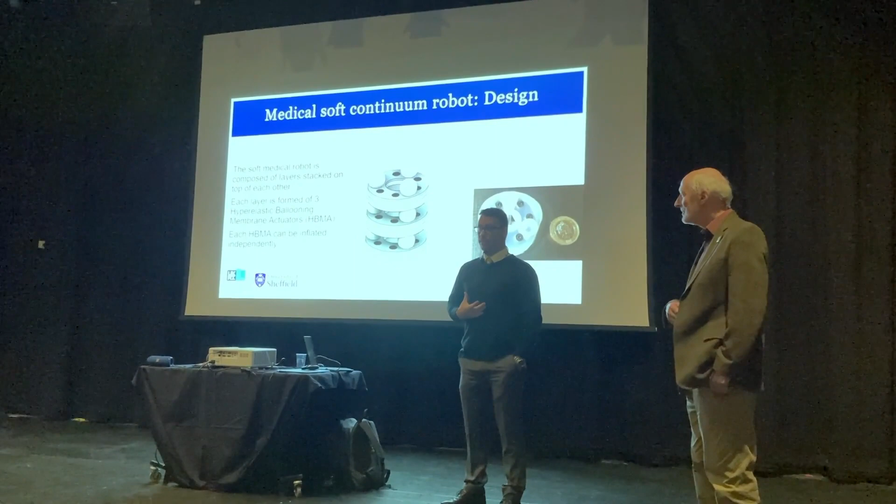Anyway, to be honest, since they're missing the esophagus, these patients don't eat any solid or even liquid food — they're fed through veins directly because it's a really complex pathology. So food passing while the robot is there isn't necessarily a big concern for the esophagus. For short bowel syndrome, it's more likely they'd be allowed to eat, but we expect with the hole, maybe only liquid food.

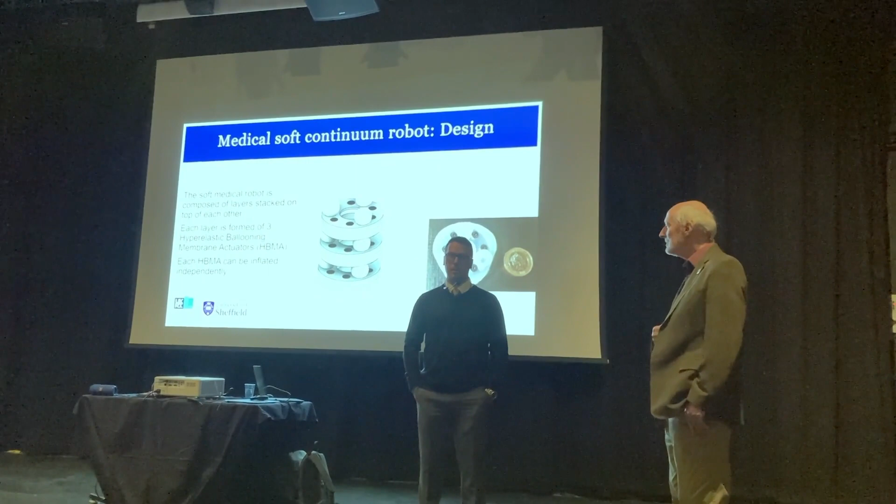We can't remove completely the sensors. The idea is trying to reduce the number. For example, for most of the stiffness control or impedance control, we need to add a force sensor, either at the end, but in that context we will need several sensors on the links as well to detect what's happening. So we still need at least encoders, for the time being, which can be...

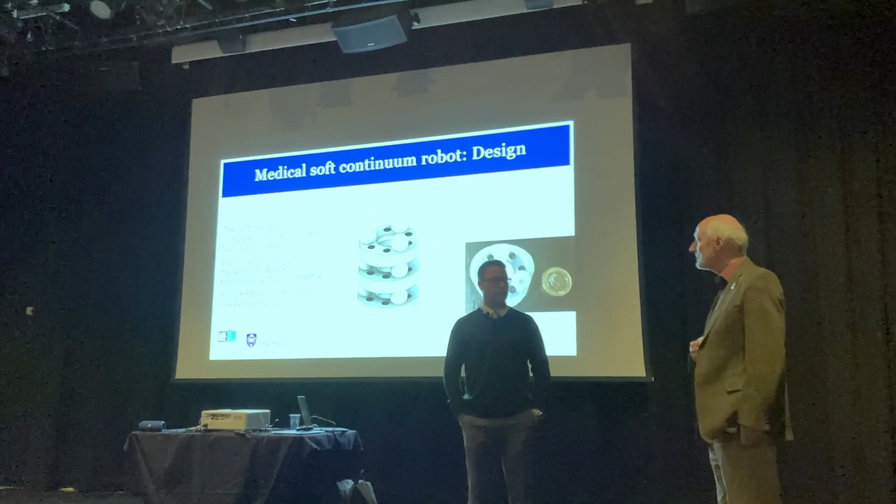affected by the radiation. Now, they design some sensors that are called hardened to go in radiation environments, but they still have limited lifetime and limited. They're still sensible to noise, but there are some solutions. Our objective is to reduce the number of sensors we need to add to our manipulator.

Any other questions? Yes, Mike. I was interested in the detection of nodules and making it safe by getting the compliance right. But the question is, how much better is a good robot than a doctor doing the same thing?

In the context of my research, the idea had never really been to remove completely the GP from the loop. I'm working actively on medical robotics, and I think ethically it's complicated to say a robot would replace a medical decision.

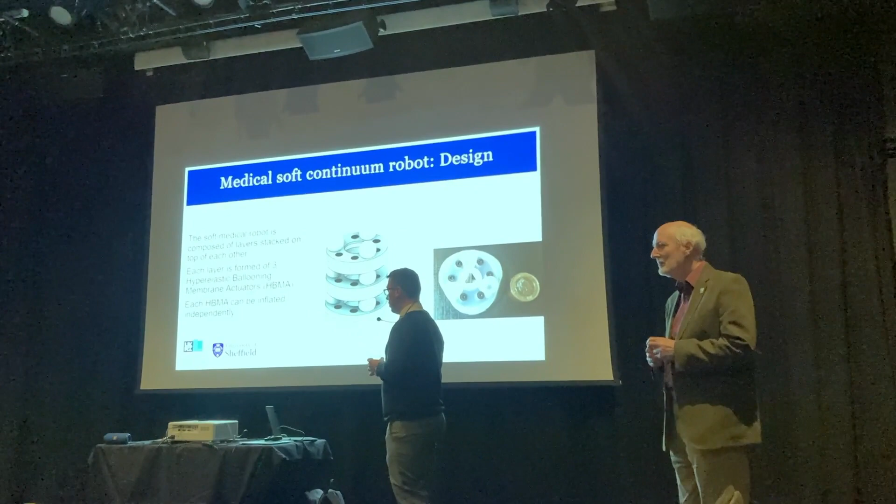Now, how good the robot was to detect the depth, I think it depends. Probably a really experienced surgeon would be able to estimate the depth quite accurately, but it's not something they train too much to do. And in particular, if we switch to the minimally invasive context, sometimes the surgeon doesn't even have access at all to those types of tissues. So it depends on the training of the surgeon as well.

A good surgeon will be better, but a robot would be better than a poor or learning surgeon. Or maybe would the idea be to use them both together? How far will you be able to automate, or is it always better? Because a surgeon gets tired, a robot doesn't. Is it best to have them both together or something?

I think we're still at the stage where robots and surgeons should work together. Most of the surgeons are really robotic enthusiasts because they like the fact that we reduce invasiveness. Sometimes with those tools, they suppress any parasite motion from the surgeon, so it allows much more accuracy, much more precision. They really like that aspect.

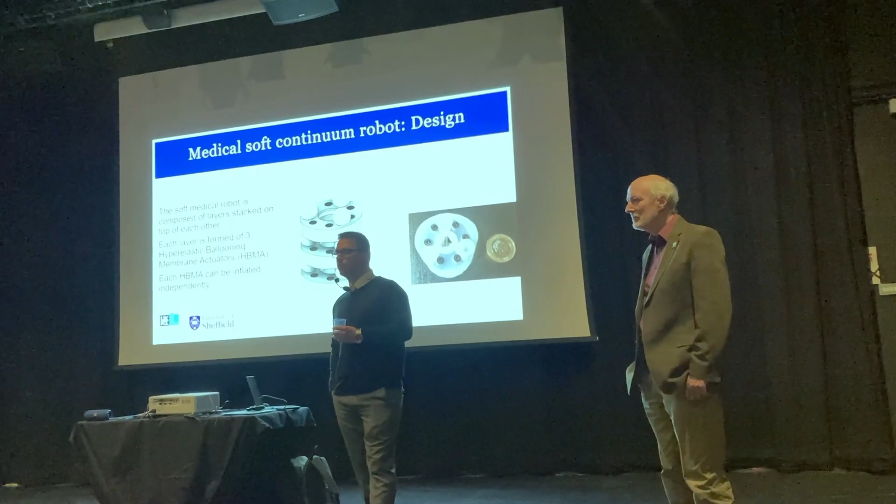Now, I think robots and surgeons should work together. For the depth estimation, there are also some other tools using imagery that can do the same thing. The problem with some of those tools is, for example, if you're using X-ray, it's not really good to expose people to X-ray for too long. So it's just a different approach.

But I doubt that palpation will ever be the most accurate way to determine the depth. Would it be in combination with, say, ultrasonics or something like that? Exactly. So there we would reach a kind of sensor fusion, which I was already investigating with the tactile aspect and the kinesthetic aspect.

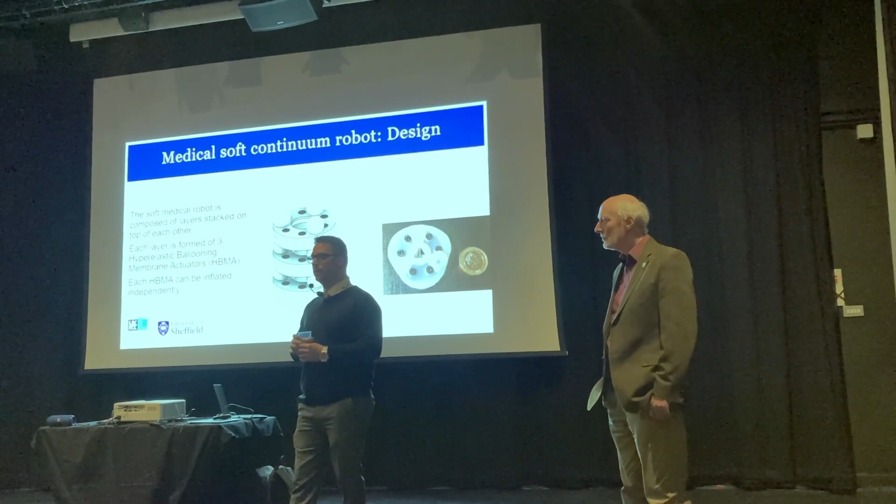Combine the detector with the sensor. Exactly, so I believe that by mixing the number of sensors we could reach something maybe non-invasive and very accurate. But the idea here was really to also understand how palpation works, how it's performed, because when you talk with surgeons, they're doing those gestures every day.

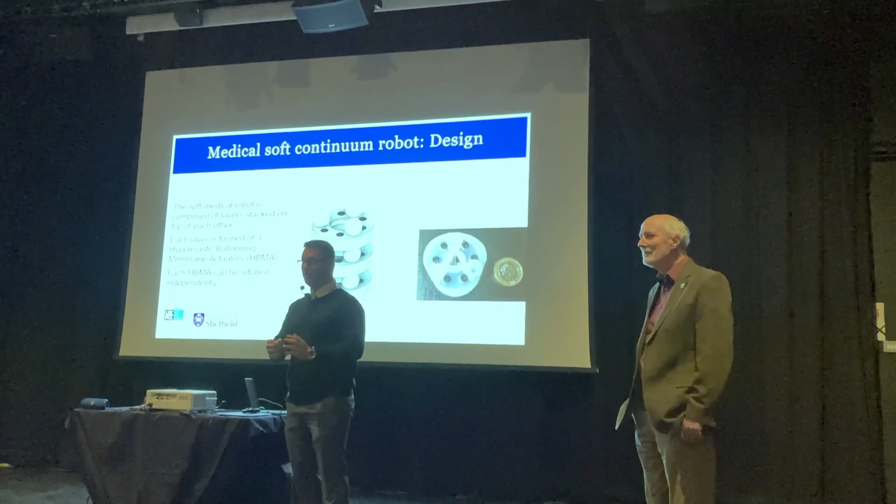I don't know if you ever noticed the way sometimes they tap to perform diagnostics. It's extremely hard to ask them, what are you measuring there? Because they've been doing that thousands of times, they know exactly what to expect, but they're not able to explain physically what they're doing. So we're still in the process where we learn from their gesture, we're trying to interpret what's happening and give it some sense.

So our hypothesis, once again, was probably that compliance is playing its role, and this is how we explain compliance could impact things. But it's still a scientific aspect to try to understand those techniques, and can we mimic them through engineering. So there may be a role for artificial intelligence with that.

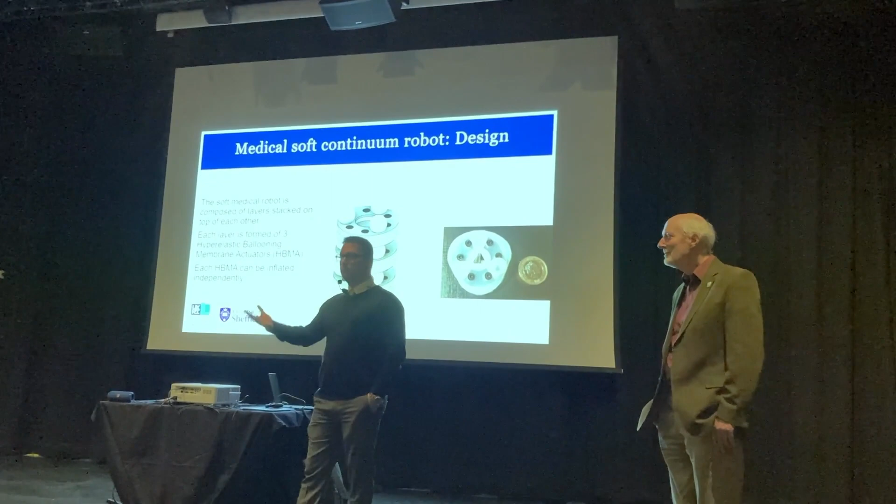Yes, very certainly. I mean, Bayesian inference is widely used in artificial intelligence as well. We talk a lot about deep learning nowadays, but it's not the only way to do AI. So Bayesian inference is definitely one.